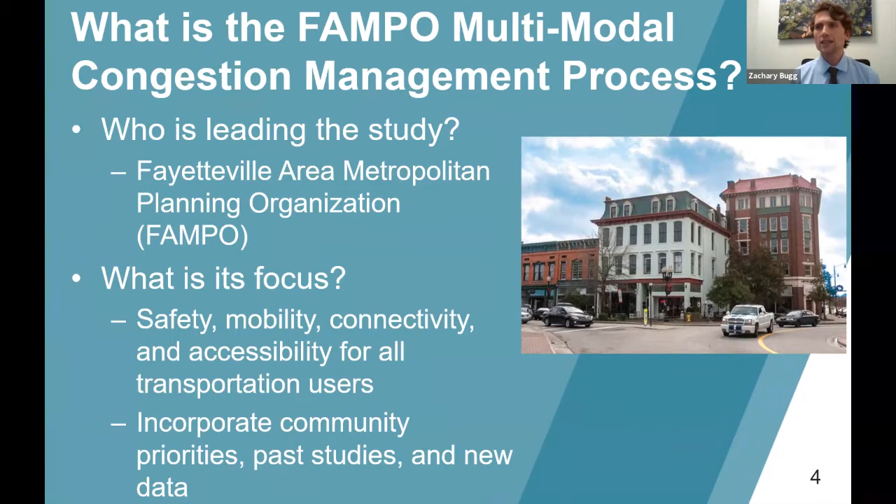So what is a congestion management process? It is undergone by metropolitan planning organizations of a certain size. They are federally required to provide this update to congestion management every 4 years. It's a comprehensive safety, mobility, and connectivity assessment for all transportation users. It encompasses the entire Fayetteville Area Metropolitan Planning Organization and study area for that MPO's limits. The purpose is to incorporate previous work, past studies, as well as new data for all modes of transportation.

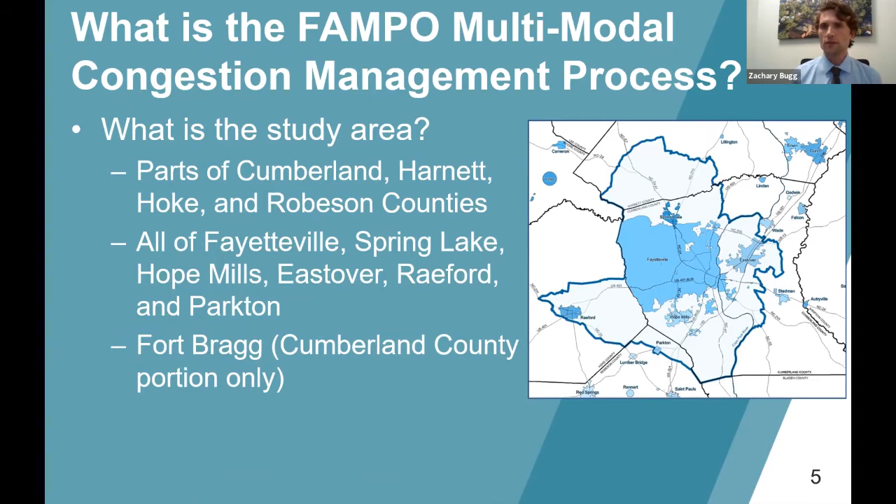As I mentioned, the study area includes the entire MPO limits, which is parts of Cumberland, Harnett, Hoke and Robeson counties. It includes all of the municipalities that you see here and the Cumberland County portion of Fort Bragg. So quite a large study area, over 250,000 people in population.

It is really fundamental to provide a list of project goals and objectives when you embark on a large study like this. Some of the project goals are to enhance the multimodal transportation system, support performance measures that are federally mandated, as well as state through NCDOT and local through the Fayetteville Area Metropolitan Planning Organization, coordinating with all local stakeholders, including all of the municipalities within the MPO's limits, MPO staff, county staff, as well as NCDOT division staff.

At the end of the day, we want to develop recommendations that are implementable within the NCDOT prioritization process. There is a pretty robust statewide funding mechanism through which all projects start at the local level, like in a plan like you see here, and are then scored through the statewide prioritization process where they compete with projects across the state. So it's very important to provide recommendations that score highly within that process so that they can be funded.

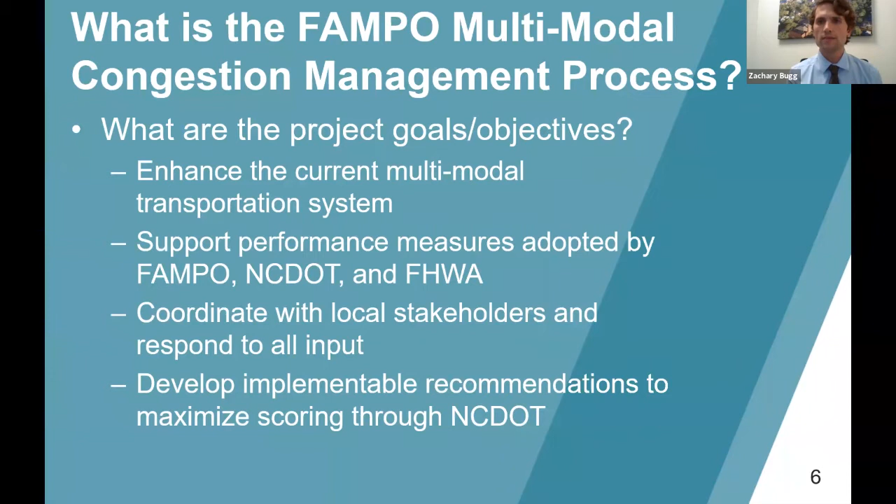How will the study address environmental justice? This has been a very high priority performance measure outlined by the MPO. Really, the idea is to provide equitable transportation solutions, facilitate a broad public outreach strategy and engagement.

So that's what we have going on today, and we'll be repeating this throughout the project. We want to identify areas for improvement that aren't confined to one geographic or demographic area, but really meant to enhance the livability of the MPO and provide a broad and diverse range of solutions. We want to contextualize the recommendations, prioritizing projects that don't harm the community and historic resources, and actually improve connectivity, growth and development.

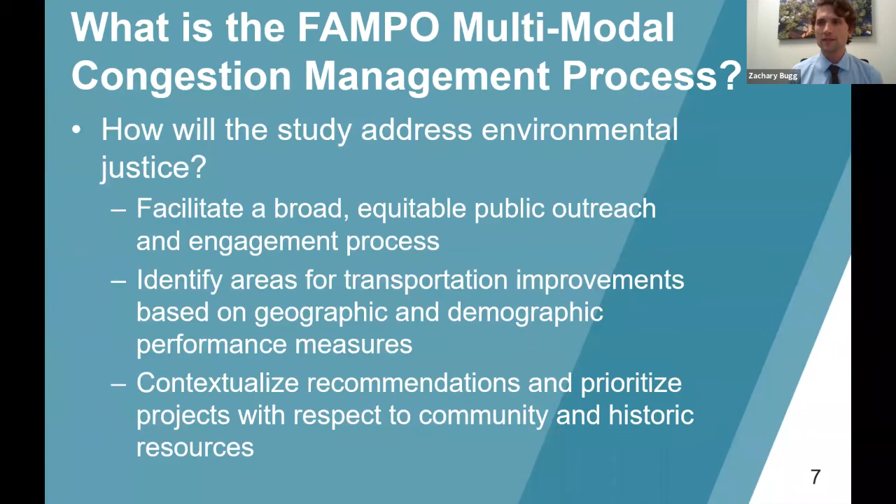A quick recap of our project schedule: we got started at the end of May, and it's approximately a 12-month study that will wrap up around May of 2022. We've been working diligently on an existing conditions assessment to identify where there may be transportation deficiencies. A big part of that is you all - we want to hear what we're missing in the data, where you may see those issues in transportation, no matter what mode it is.

So that's where public engagement comes in. We want to know what gaps we're missing. We'd like to inform you of the data we've provided and looked into, but we want to hear your thoughts. That's the purpose of a lot of this meeting and the online presence.

There's a project website, congestionplan.com, that has all of the public meeting materials you see here today, and we'll be posting the virtual meeting. It has a lot of interactive components, including maps, online comment maps, and an online survey.

Going into the online comment map, this is a very easy to use geographic way for you to leave your comments. So perhaps there's a portion of, say, Skibo Road where you see traffic congestion, or a roadway like Murchison Road where you have issues crossing the street or would like to see additional sidewalk or trail infrastructure.

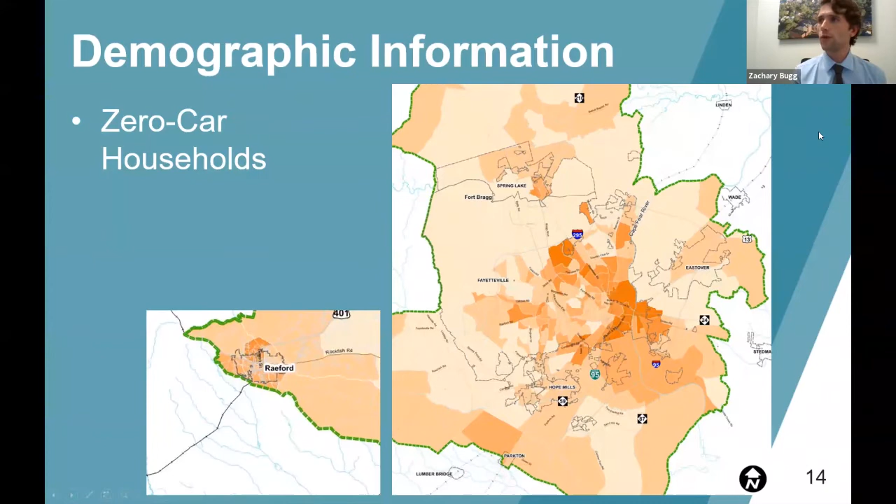One way is looking at the density of zero car households. As you can see, there's a pretty good preponderance of low vehicle ownership in the central areas of Fayetteville, but also in central Raeford. So there are opportunities there to provide additional transit service to areas where there may be households without any vehicles, either folks who choose not to own a vehicle or folks that don't have one. That's one area we look at when prioritizing transportation improvements.

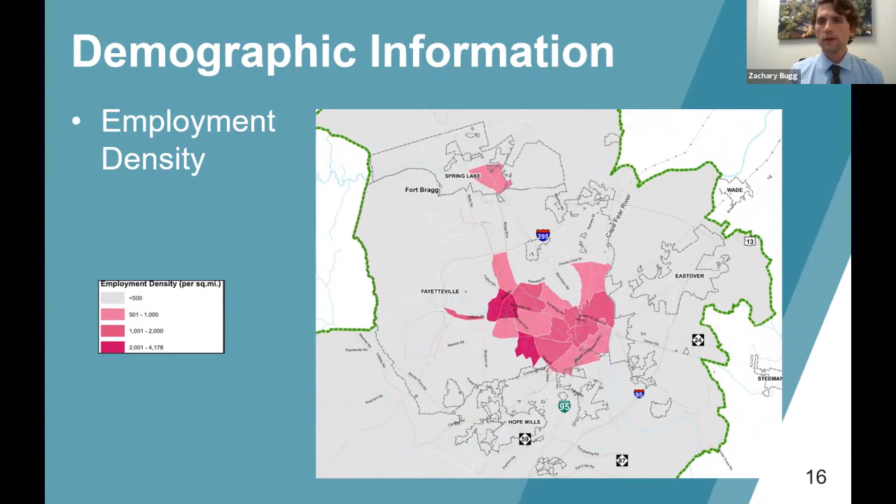And then employment density - this would be outside of Fort Bragg. Fort Bragg, as you know, is the large employer within the MPO, but this is in addition to Fort Bragg's employment. There are some areas of the MPO limits that have pretty high employment density, and we would be focusing on some of those areas for a few of the transportation improvements.

So switching gears a bit, I'd like to talk about the walking conditions throughout the MPO. We've started using an assessment of all of the crash data that involved a pedestrian over the past 13, 14 years or so, and we've mapped all of it here. You can see there are a lot of green dots on this map, and as you can see, there are a few high-risk corridors where there's a lot of pedestrian demand, and also, unfortunately, there have been a lot of crashes involving pedestrians.

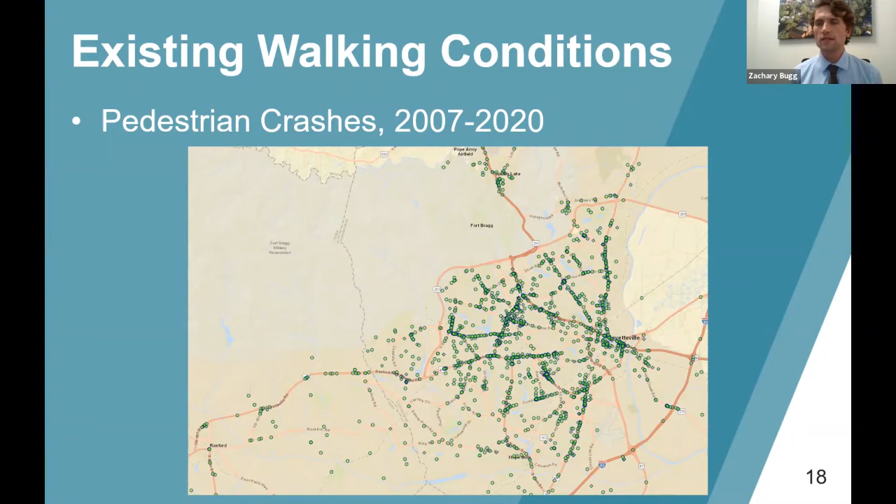So this would be step one of where we would look to help prioritize those improvements, whether it's additional sidewalk or trail facilities, improved crosswalks, improved intersections, just improving the safety of the intersection and looking at targeted improvements to help mitigate those crashes, so that we can really aim towards having very, very few.

So we're looking at all of this to assess where there might be gaps in crosswalks, crossing major corridors, and then additional areas where there may not be a sidewalk today. Where are the opportunities to provide that additional sidewalk infrastructure?

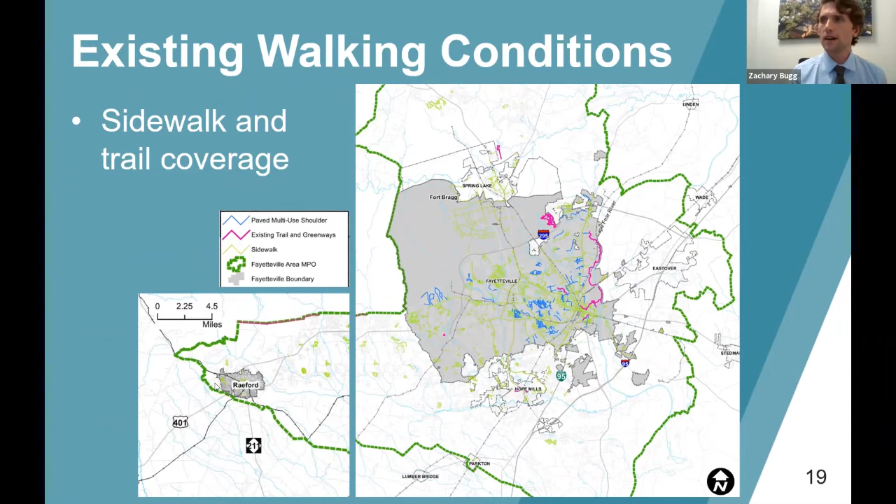So in summary, there's pretty high coverage in downtown, but lacking in suburban areas. There are many major intersections that lack any marked crosswalks or pedestrian signal heads. Just providing a painted crosswalk also doesn't always do the trick. There may be additional treatments needed, such as median refuges, signalization, looking at raised crosswalks. There's a lot of tools in our toolbox for addressing crosswalk deficiencies.

Some of the major corridors with high pedestrian crash frequency, we've listed the top 10 or so here. Again, if we're missing areas, we're really looking to hear from you all what might stand out on your typical commute, or if you're out for recreation.

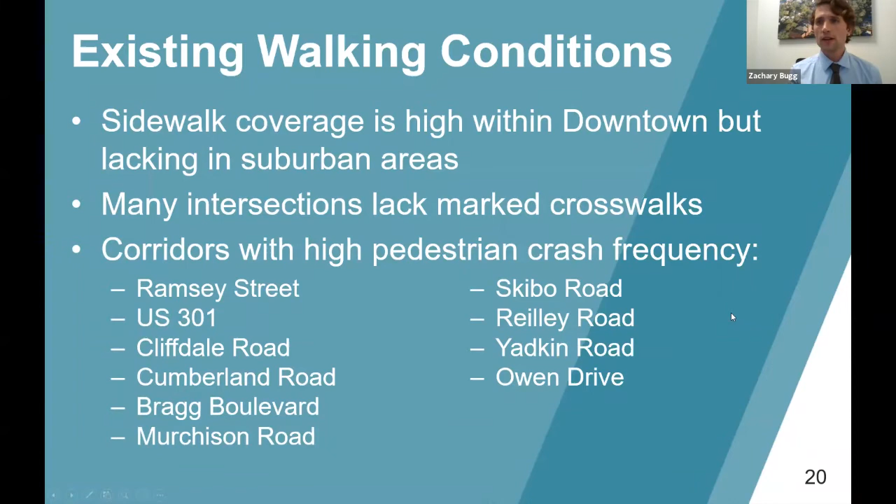So moving on to bicycling, you'll see a lot of the similar themes. Areas that are not working as well for pedestrians typically are not working as well for cyclists either. But here's a map that NCDOT has compiled for all the crashes involving bicyclists in the past 13 to 14 years. As you can see, there are some other major study corridors that stand out. Also, some areas of downtown that have had some fairly high bicycle crash frequency.

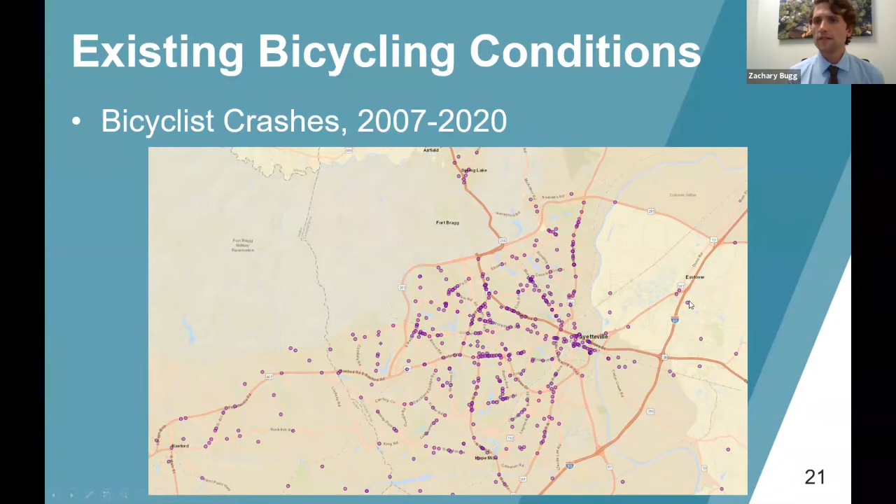Another performance measure that we look at is called the bicycle level of traffic stress. This is a measure of just how comfortable it is to ride on a roadway. There are a lot of different levels of comfort and expertise when it comes to cyclists navigating the roadway network. These level of traffic stress thresholds are meant to stratify the bicycling network and the roadway network into what populations may be comfortable riding.

So you start with level of traffic stress 1, which is comfortable for children, comfortable for those who are not experienced with cycling, all the way up to LTS 4, which is very uncomfortable or very hazardous for really any cyclist. So where you see red, the red and orange lines here are really those high stress, low comfort facilities where we may look at barriers in the cycling network, where we might want to look at improving connections across those corridors and lowering the level of traffic stress to a higher comfort level.

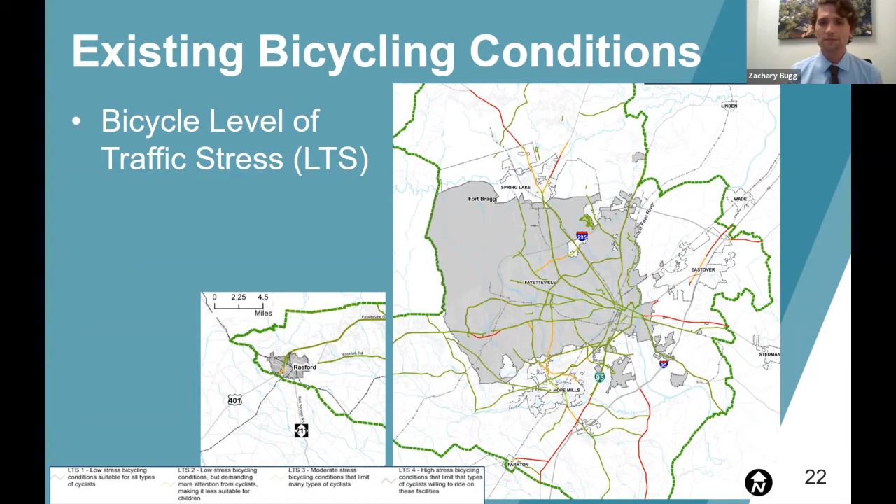So in summary, most of the urban streets in Fayetteville, we're talking very low volume grid system type streets. Most of those are good pockets of low stress bicycling facilities. The idea is to connect those with other pockets of ideal cycling conditions through trails and crosswalks and those types of facilities. I've listed here again the top 8 or 9 corridors by bicycle crash frequency, and these are where we would start for identifying those improvements later on in the project.

Again, we want to hear from you if there are corridors that we're missing here, if there are specific locations that may require additional bicycling infrastructure or improvements.

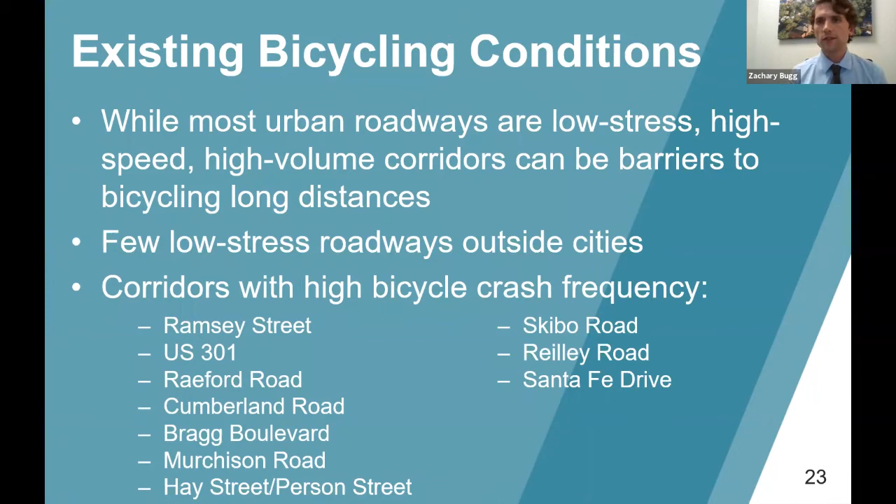The next mode on our list is transit. We started by providing a map of the existing fixed route bus service throughout the MPO. This is just one provider of transit. There are other on-demand providers that provide the populations within the MPO with transit service.

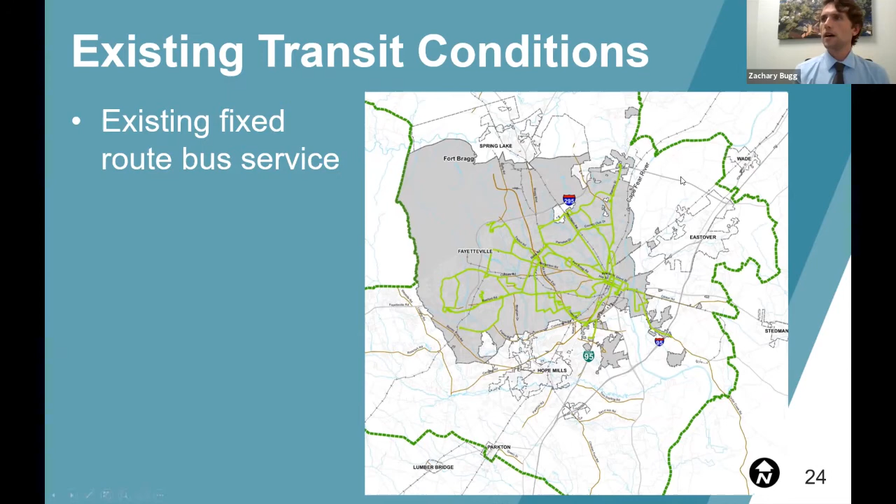This is just a map of the FAST network through Fayetteville, so it services just within the city of Fayetteville limits. It serves most major corridors within the study area, but not all. Most of the routes, actually all but a few, are limited to a 60-minute headway.

Moving on to driving and automobile mode, we looked at the entire MPO, which is a large study area. Obviously, we're not going to look at every single intersection for a process like this. We've worked with the MPO staff and all of the project stakeholders to boil down the analysis into 48 major study corridors within the project limits. You can see all of those corridors in the project mapping information on the project website.

We looked at a few different performance measures on those corridors. A lot of you are familiar with travel time—that's how long it takes you to get to work, or home, or to whatever destination you're trying to get to. One thing you may not think about as much is reliability, which we'll get into as we move through this data. We also looked at delay, that additional travel time you encounter due to traffic congestion.

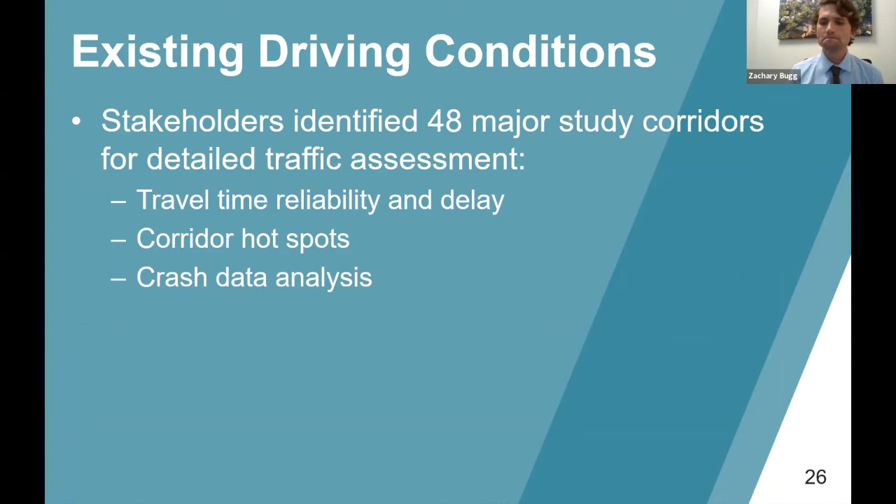Quickly identifying what travel time reliability is: it boils down to that additional planning time you need to provide for your commute or travel time that may fluctuate day to day. On Monday, you may leave for work and it takes 20 minutes, but on Wednesday it may take 30 minutes. So it's really looking at that reliability and how you can narrow it down to have a more reliable trip. We've looked at that throughout the study network.

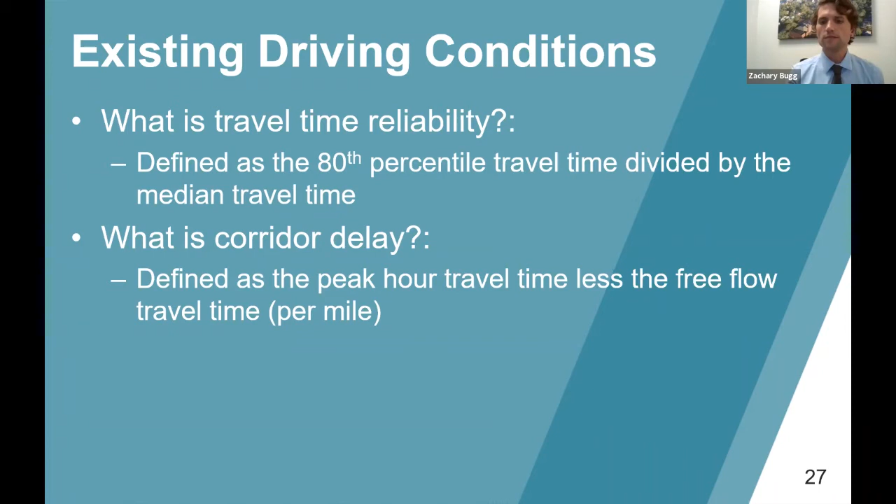Corridor delay is that extra travel time you'd encounter frequently and routinely due to traffic congestion during peak hours. We have a few maps here—I've chosen to show just the afternoon peak hour, but we also looked at weekday morning peak hour. Afternoon is more interesting because there's more delay.

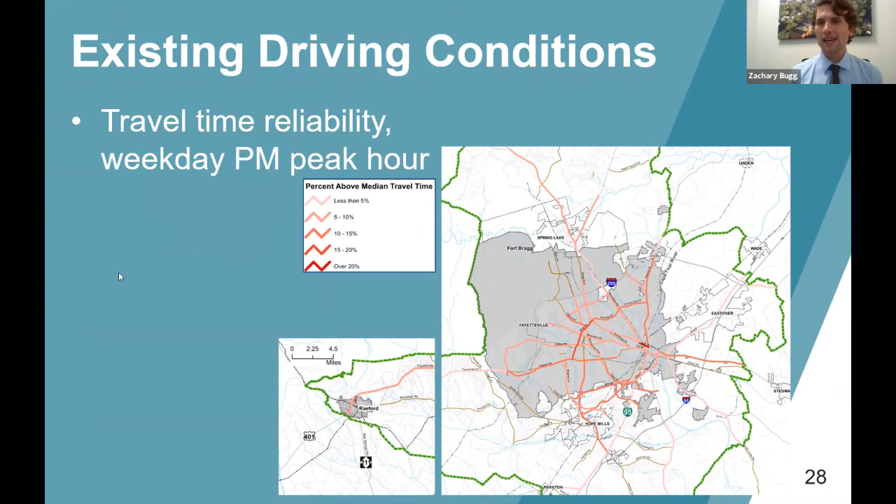When we look at reliability, the map provides a scale from less than 5% planning time over your typical travel time, all the way up to more than 20% over typical travel time, accounting for that additional planning time in your commute. You can see some of the major corridors here that are the worst of the worst—Skibo Road, going all the way down to Highway 59 through Hope Mills. These corridors are the least reliable, and that's what would rise to the top when looking at transportation improvements.

Similarly, when you look at delay, we boiled this down to delay on a per-mile basis to compare corridors of differing lengths. You can see US 401, Ramsey Street, and Raeford Road are some of the corridors with the highest delays—over a minute per vehicle per mile really adds up along a pretty long corridor. As you'd expect, corridors coming into town from Spring Lake and up from Hope Mills are the worst in terms of delay.

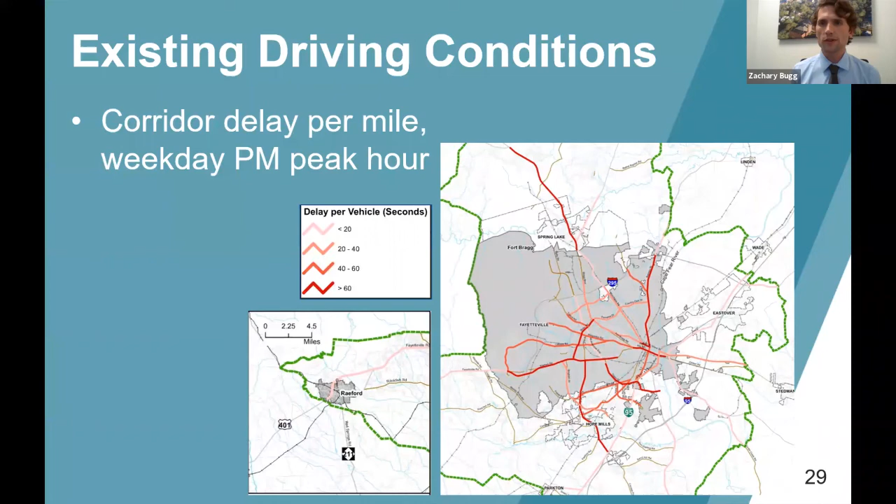We looked at intersections on a point-by-point basis to look at where might there be the worst level of service. We use a term called level of service to really assign a letter grade to each intersection based on how much time people are spending waiting at the intersection due to traffic congestion.

It's really level of service E and level of service F that we'd be looking at for the worst conditions. Everything else we looked at is level of service D or better, and those aren't going to be prioritized as highly unless there's something we're missing, which is what we want to hear from you. If some of these other intersections seem like they should be LOS F instead of D, we want to hear that from you and see if there might be something to refine in the data.

So you can see here a lot of the major intersections along Cliffdale Road standing out. Also MacArthur and some of the other major corridors within the study area have these hotspots and this high level of service concern.

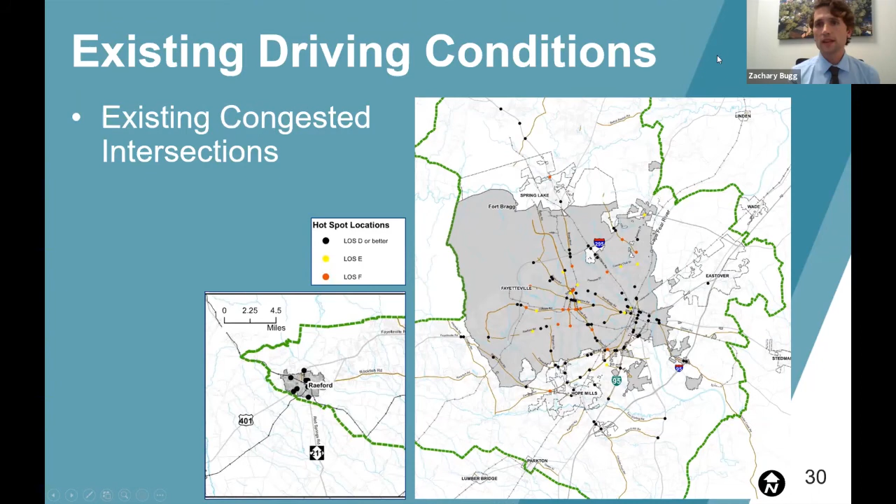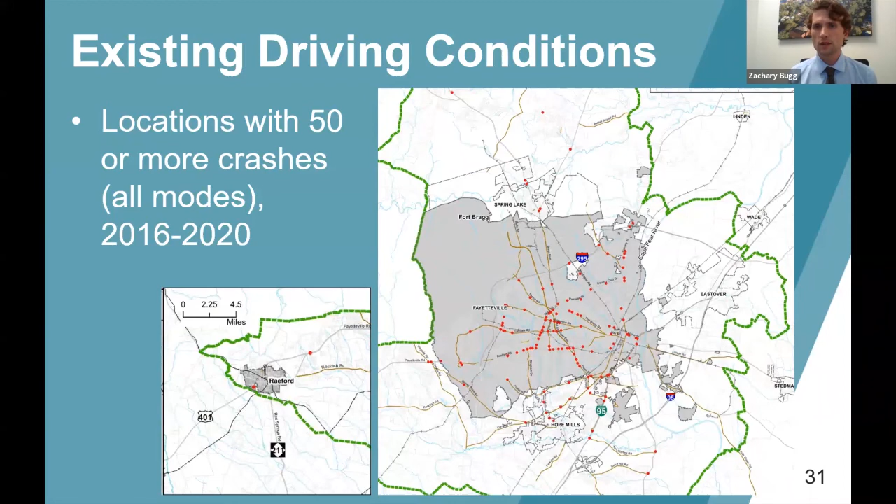Finally, we looked at crash data throughout the MPO and identified each of the intersections with more than 50 crashes within the last 5 years. This is looking at those high frequency locations where there might be high volume, but also just a lot of crashes. So this is another performance measure we use when ranking these corridors.

So just looking at the top 10 to 15 corridors, considering delay, reliability, crash data, and hotspots, these are the ones that stand out to us that we'd be moving forward with to identify project alternatives and solutions to prioritize through the NCDOT process.

If you feel there's a corridor missing from this list, or if you'd like to provide feedback on any of these corridors where there may be conditions we're missing, we'd really welcome that through the online survey, through your comments here, or any other way you'd like to provide feedback. We'll be compiling that and putting it into our data before we start to prioritize those improvements.

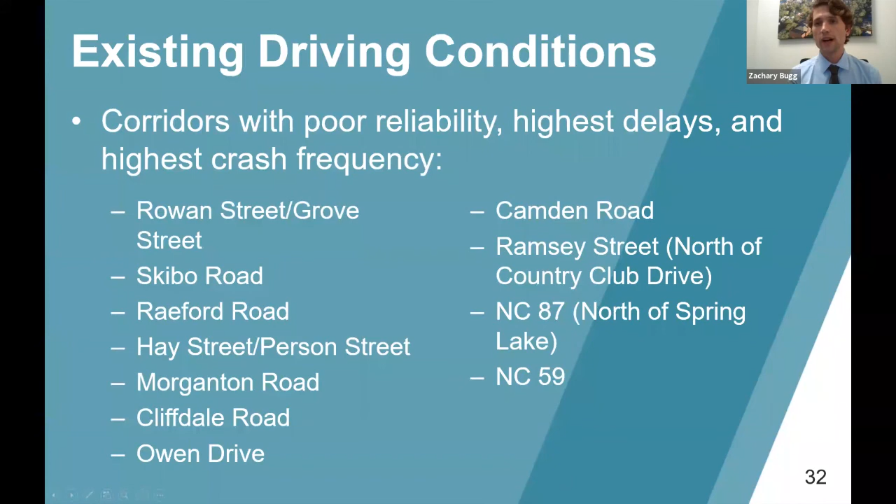So in summary, I'd just like to wrap up here what we have done to date. We looked at 48 major corridors throughout the MPO.

We also looked at those from many different modes' perspectives - someone who is walking, someone who may be cycling or taking transit, and finally someone taking a passenger car. Looking at multimodal safety deficiencies, congestion, assessing key gaps in connectivity, and looking at transit service gaps where there might be additional ridership or propensity for additional ridership. We boiled all that down into a list of deficient corridors and deficient areas.

Our hope is to supplement that with feedback from you all through this public meeting, and then also through the online survey and comment map.

So in terms of next steps for the project, we have about 8 months left in our project timeline, moving into the end of next spring. We will be completing an existing conditions booklet after incorporating feedback from these 2 public meetings today. That will include all of the mapping we've shown here, posted on the project website.

After completing that existing conditions booklet, we will move into the future traffic assessment, forecasting traffic volumes about 20 years into the future, and updating all of our data to look at where something is failing now and will get worse, or where something may not be a problem now but could be after growth in traffic volume.